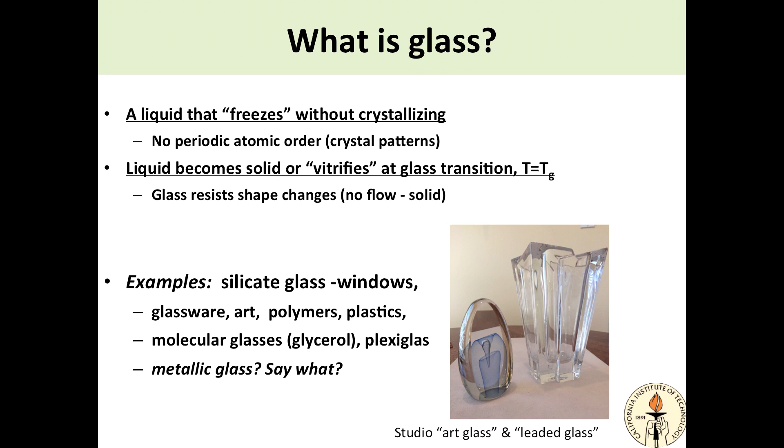Polymers and plastics are glasses. There are molecular glasses like glycerol, soap. Plexiglass, metallic glass, and say what? Most people ask me if you can see through it. What makes something a glass is where the atoms are at. It's got the atomic structure of a liquid.

What makes something a metal or a semiconductor or an insulator is what the electrons are doing. And so we have a material here that's glassy from an atomic point of view, but the electrons are free to roam, so it conducts electricity and looks like a metal. Okay? I'll show you pictures, to give you a better idea.

Almost every metal or metallic object that you've ever encountered in the real world has a crystal structure that looks like that; that's called face-centered cubic, that's the structure of copper and nickel and stainless steel. The atoms are arranged like that. And what you see is they're periodic, they have patterns. If you know where one atom's at, you know where they're all at. All you have to do is translate along and it's all pretty happy.

A liquid, if you melt copper, well, it's kind of a mess. We'll look at a picture in a minute, but if you take copper and mix it with titanium or zirconium, you can make a glass, and that's a molecular dynamics simulation done by a former student of mine who's a professor at Johns Hopkins, and that's a picture of copper zirconium metallic glass. And you see, this looks like a kind of jumbled up mess. It's a liquid that's frozen.

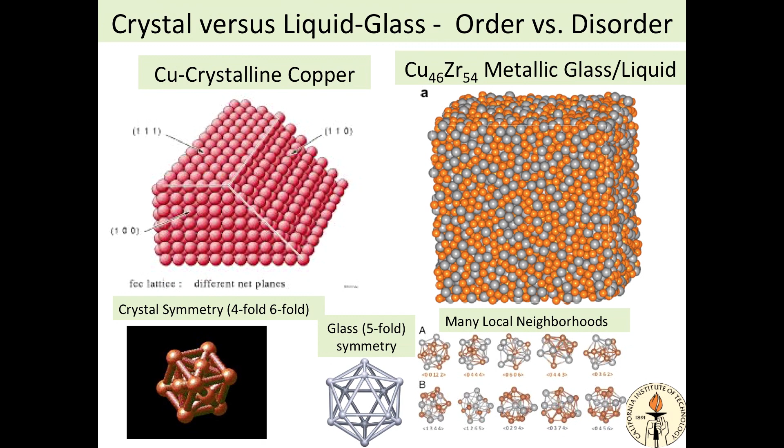And if you look at what's going on in any particular location, there's just all kinds of local neighborhoods. Some places you've got icosahedra, they have five-fold symmetry. When you have a crystal, five-fold symmetry is not allowed. That doesn't fill space. Crystals have three-fold, four-fold, and six-fold symmetry. Liquids locally have icosahedra, right? So they're different structurally and no long-range order. So that's sort of what the atoms look like. So the question next is, how do you get from here to here?

Okay? If you cool a liquid down, when the liquid's at high temperature above the melting point, it sort of looks like this. Every atom's got a little bit different neighborhood. Some atoms are squeezed together by their neighbors. It's like a crowded mess on a city street. And it's sort of like society. How the heck are we going to get organized, right? To get from a liquid to here is actually an extremely interesting exercise.

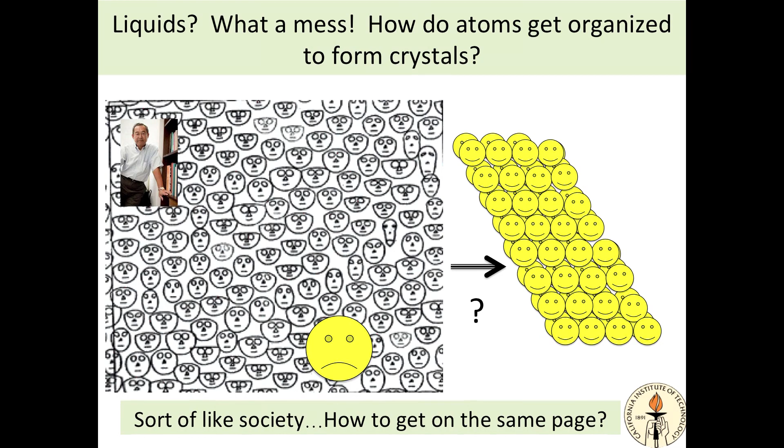Now, when you cool a liquid down, things vibrate slower. It shrinks a little bit, thermal contraction with cooling, and everything gets a little more crowded, and it's like you in a crowded room with standing room only. When the density of people gets too high, you just can't move anymore, right? We freeze. And when you freeze the liquid, you got a glass. So as you cool it down, either you get to here or you get stuck here, all right? And so how does this happen?

Well, the talk's not too technical. It all starts with nucleation. Nucleation is an interesting concept. If you're trying to solve a problem, you have all kinds of ideas, and then one day you wake up, there's that eureka moment, and you say, oh, I understand it now. I just didn't have to see it the right way. You nucleated an idea, right?

Or you post a video on YouTube, and you get some views, and sometimes you get a few views, and then you get a few more views, and then if the mood is right, it goes viral, right? So there are these fluctuations in that random liquid mess, and crystals try to form. If they're too small, they're fighting against their neighbors that are in the wrong place. As you get more and more of them together and making a bigger crystal, they win the battle against their neighbors. They call that the nucleation barrier.

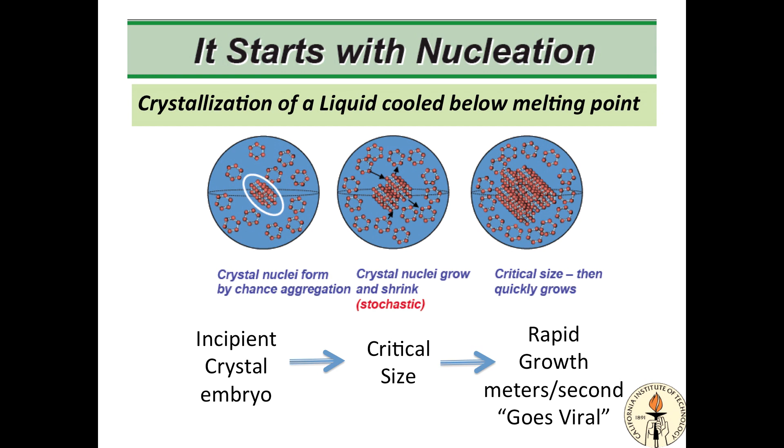And if you get over that nucleation barrier, if the nucleus of atoms gets to a critical size, then it takes off and it grows like crazy. Once it gets critical, it grows. So when we want to make a glass, we have to stop that critical formation of a nucleus that will grow. And it's actually wonderfully exciting to see what it looks like.

Now, just as in the way of explanation, I'm going to show you an infrared movie. And the movie's actually a liquid sample. It's in a cylindrical form. It's contained in a quartz tube. And we've got an infrared video camera which sees temperature. And when a crystal forms, things get organized, they lose some energy, they fall into a potential energy well, and all that energy that's lost is given up as heat. So when a crystal forms, it gets hot.

So if we watched a liquid that was cooled below the melting point, a crystal forming somewhere would correspond to a sudden release of heat at a point. And once it reaches that critical size and takes off and goes viral, it's going to grow like crazy. And so I'll play the movie. This is an infrared camera, so the camera sees, what we're going to do is we have a liquid at low temperature, and I'm going to heat it up very fast. We'll talk later about how we heat it up really fast.

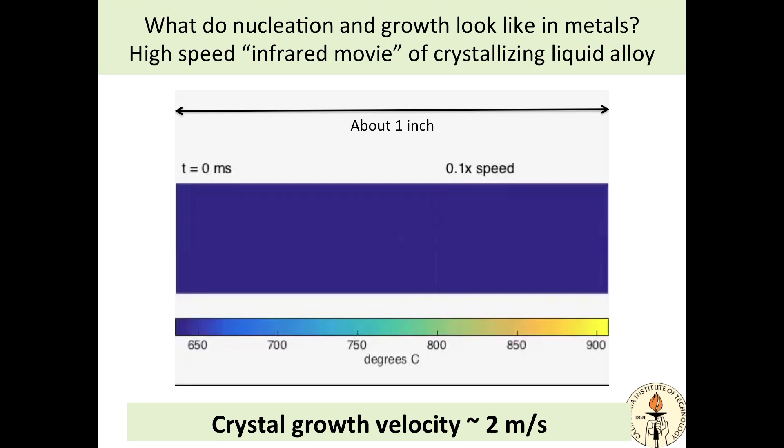We heat it up at 100,000 degrees per second, and we get to some temperature and sit there, and we watch the nucleation process. And the crystals form somewhere, and then they grow, and you can see it because it lights up. So let's play the video. Okay, that's fast, that's real time. And now I'm going to play it at 0.1x speed, and these are thousandths of a second. So it's a very fast infrared camera, and there a crystal formed.

And this is about an inch. And in a few hundredths of a second, the crystals grow all the way across the sample. Once it goes viral, it goes like crazy. You can actually figure out it's going 2 meters per second. That's a little faster than you can walk. It's also enormous when you think about how big atoms are. This crystal forms, and then it's going to grow. And it grows by adding atomic planes, and it's going to add 10 billion atomic planes per second.

So once the crystal's stable, it just, pew, right? And it's all over in a flash. So if you take a piece of copper and you cool it down, at some point you're going to form a crystal, and then it's going to solidify by releasing all this heat, and it's going to shoot through the sample. That's how. Now, if we're going to make a glass, we have to avoid the nucleation event, the local embryo that triggers this. And so, just a little bit about the science.

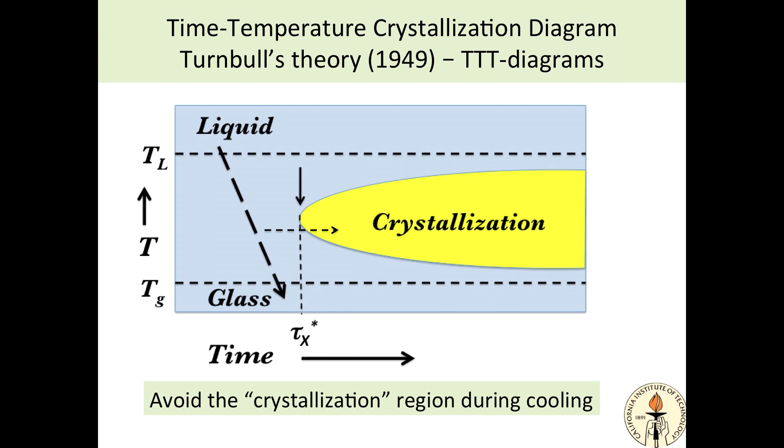So Paul developed something called splat quenching. He took a piston and an anvil and dropped a droplet of metal alloy and smacked it. And the anvil and piston are made out of copper. They conduct heat really fast. And he figured out that you could cool a metal at 1 million degrees per second by splatting it. It's called splat quenching. Well, he started splat quenching metal alloys and shortly discovered that some of them form glass. You cool it fast enough, there are no crystals, you get a glass. That was the first metallic glass, 1959. Okay?

Rapid solidification. Paul started a whole field. It was called rapid solidification technology for processing metals at high cooling rates. Right? But he discovered metallic glass. That first metallic glass was an alloy of gold and silicon. It's a gold glass. It's like 20 karat gold, but it's glassy. Okay? The problem is you have to splat it into a foil that's about 1/10 the thickness of a hair to get the heat out fast enough to beat the crystallization, right?

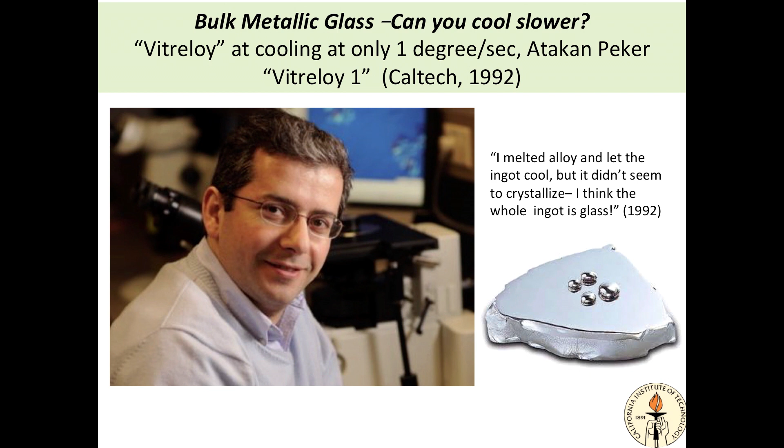This is a big chunk, and this was a very good glass former, kind of like silicate glass. It starts to look like more common glass. That's a nice ingot. We put it in the electron microscope and blow it up about 400,000 times, and you can see atoms, or you can resolve atoms, and they're all jumbled up. It's liquid-like, no crystals. If you look around, you'll see pentagons that are part of icosahedra and all that. It's a nice glass.

And so the way we usually tell where the atoms are is we X-ray it, and the X-ray pattern looked like a liquid. It looks just like a liquid metal. And if you heat it up and look at how it behaves thermally, lo and behold, there's a glass transition. And you get up above the glass transition and it softens, like doing glass blowing on silicates. You go above the softening point, it gets soft, you can blow it, work it, so it softens up.

And then if you keep heating it, suddenly it crystallizes. We hit the TTT, we hit the crystallization nose when we heated it up. And you take the crystallized material, you keep heating it, and it melts again, and so we made a glass. It's a big chunk of metallic glass.

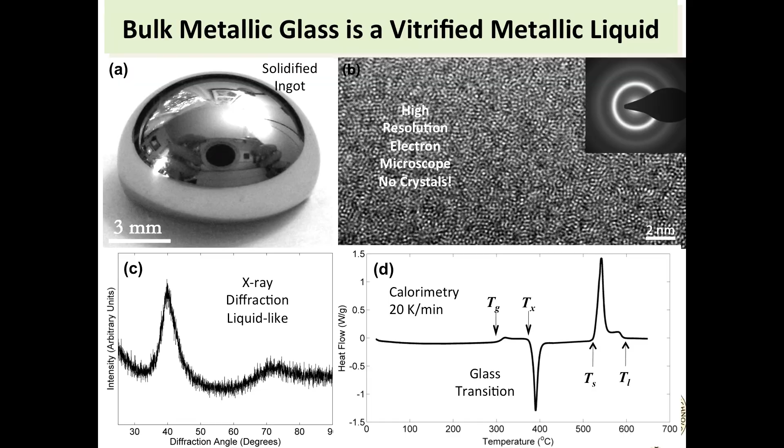So, of course, when we could make these things in bulk form and at low cooling rates, Atakan Peker was only cooling this at, go back, 1 degree per second. That was 1 million. He's only cooling at 1 degree. So we slowed the cooling from the Duwez experiment down by 1 million times, and we still make glass. So now how do you study these liquid metals? Well, we want to study crystallization. We want to map out that crystallization curve. We want to test the theory that Turnbull proposed.

And at the time that we discovered this, I had a colleague up at JPL named Won Kyu Rhim. And Won Kyu was involved in other things. He was trying to levitate spheres, droplets of liquid. And it was water. And he developed a technique called electrostatic levitation. What you can do with this, if you shine a laser on here and kick off some electrons, the ball gets charged, and then you can use an electric field to counteract gravity, and you can levitate the ball.

You can put it in a vacuum chamber, and you can instrument it with video. You can see the crystallization event when it lights up. You can do all kinds of things. You can ping the drop and watch it oscillate and back out the viscosity of the drop. You can see how it's becoming more viscous as you cool it. You can map the freezing curve. So we can go in and look and see exactly what's going on.

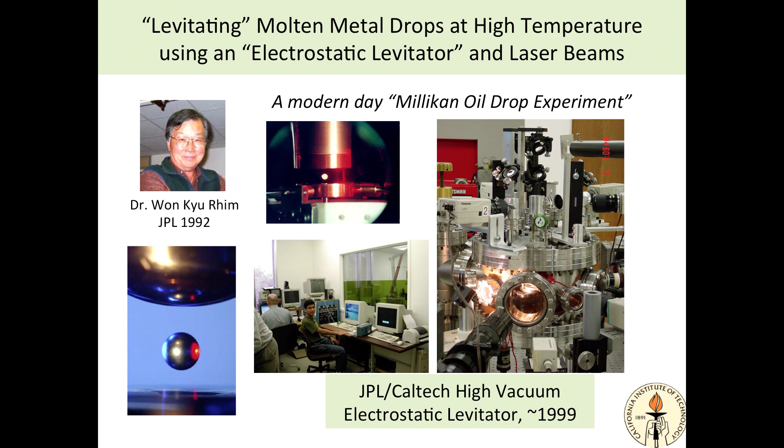So with the electrostatic levitator, there's a levitated ball of the vitrified alloy, the zirconium, titanium, nickel, copper, glass forming alloy, and it's sitting here at 1300 degrees centigrade, 2000 Fahrenheit, and it's in a vacuum chamber, and there's no container, it's just hanging out by levitation.

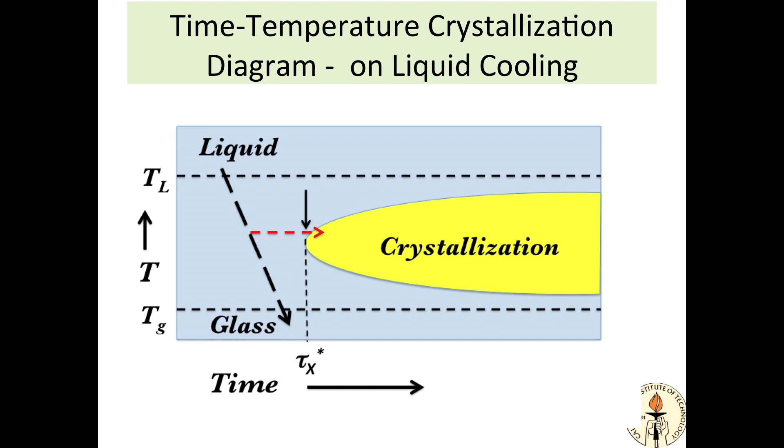Okay? So we study this, and of course, going back here, let me remind you of this. So we melt it, we can cool it down and hold it here by adjusting the power of the laser that we're using to heat it. And we can sit here and measure how long it takes to hit this. And so we can measure the crystallization map. And there's the map of Vitreloy 1.

And you can see it takes 10 seconds, for example, here. That's a different alloy. This one takes 10 seconds to nucleate crystals. And we can ping the drop, make it oscillate, and if you watch the damping of the drop oscillations, that tells you what the fluidity or the viscosity is. So you can do all this stuff and measure it.

It's fun to look at a movie again. So this is a levitated drop, and what we've done is heat it up above the melting point, then we turn off the laser and watch it cool down, and then it lights up when it crystallizes. So there it's hot, 1300 degrees, it's cooling down, now it's down to 600 degrees, and about 600 C, boop, there it crystallized. That's what it looks like. Crystal nucleated somewhere, grows like crazy, gives up a bunch of heat, it lights up like a light bulb.

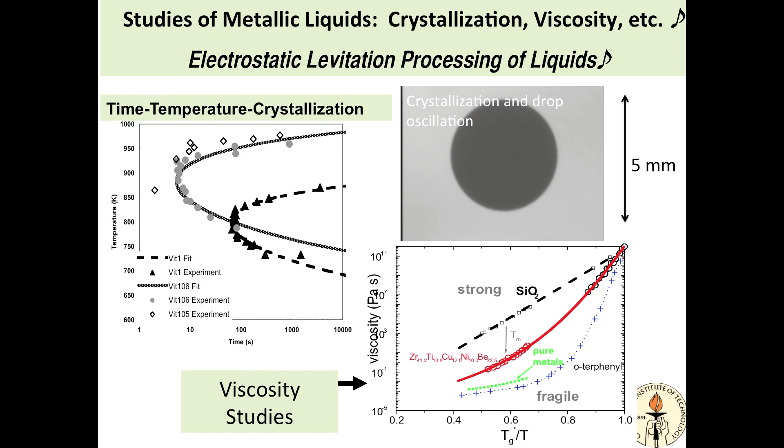You see the drop was spinning. We can ping the drop. If you do high-speed video, you can watch the drop oscillations, you can determine the viscosity, so we can go in and measure all of the physical properties of the liquid that go into Turnbull's theory, and we can test the theory, and so on. So what do we learn?

Well, we found out something that Turnbull already told us in 1969, that if you make the ratio of this glass transition temperature and the melting point of the liquid, if you make the ratio of Tg over TL high enough, you squeeze out the temperature region where crystallization can occur, and that pushes the crystallization map to much longer time, so you get a good glass.

So we learned that. And we learned that the more viscous the liquid is, the slower the atoms rearrange themselves. When you're down in the middle of this region where you're at risk to crystallize, if the fluidity is low enough, the rate of forming embryos goes down, and if you freeze it far enough, you get a glass. So the two things that are competing are the ratio of this, and so we put this story together. I brushed a lot of things under the rug, but I can tell you simply what's the idea behind developing bulk metallic glasses, the materials I'll tell you about in the second part of the talk.

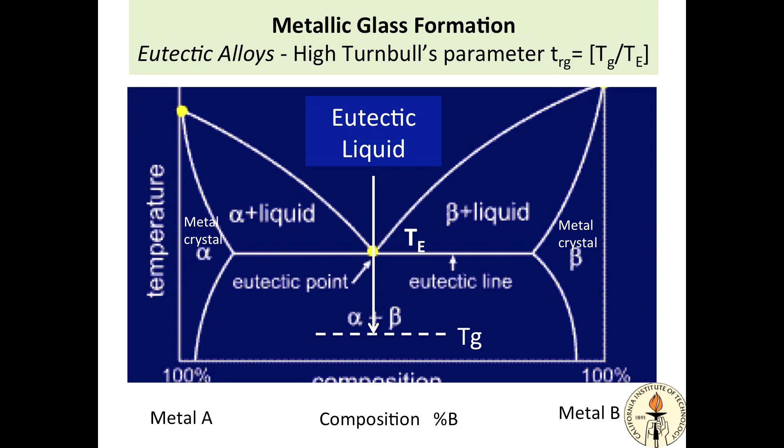The idea is this. This is called a eutectic alloy, and this is just a schematic diagram. We have a metal A and a metal B. They have a melting point. If we put the two metals together, they can melt at a much lower temperature. Eutectic, tektos, Greek word for liquid, eu together, melt together. They melt together at a much lower temperature. Well, Turnbull told us we want this glass transition, which is kind of down here, to have the highest ratio possible with the melting point. Obviously, when things melt together, you drop the melting point, the Turnbull parameter becomes favorable.

The business of developing bulk metallic glasses is a business of putting 2, 3, 4, even 5 or 6 metals together to make a very deep eutectic, where we push the melting point very close to the freezing point, the glass transition, and that just squeezes the crystallization out. It works. With that idea, that's how Peker found the first bulk metallic glass, the ingots. Well, let me show you. Once you learn more, you do your science and figure out how this viscosity story works.

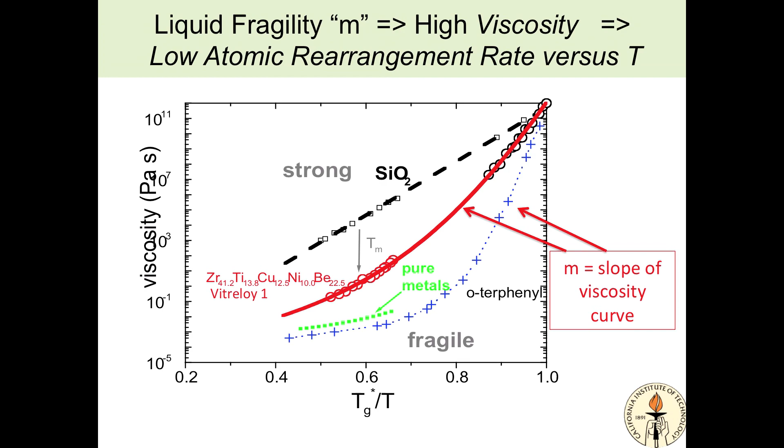And I don't want to spend too much time, but when you heat a liquid up, all I want to show you here in the viscosity is that at the glass transition, the viscosity is 1 trillion Pascal seconds in some units. And if you have a high temperature liquid, it's 1 or 1/100th of a Pascal second. So when a liquid freezes, the viscosity, or its resistance to shear, changes by 1 trillion times as you cool it down. So this freezing is incredibly rapid. It's like the standing room only crowd. As you squeeze people together, the possibility of rearranging yourself gets frozen out very rapidly. It's called a jamming transition for obvious reasons.

So we play games. These are maps. And we were interested in developing practical metallic glasses that you can use. This is recent work. Now we're up to 2008, 2009, right? So we were exploring iron, nickel, chromium metallic glasses. We alloyed them with things that have deep eutectics, like phosphorus and silicon, and we coax it into a very deep eutectic and squeeze out the crystallization, and we make bulk glass, except these glasses are chromium, iron, nickel. What's that called? Stainless steel.

Right? That's amorphous, that's glassy stainless steel. And how did we get there? It's a long story, but basically it's the eutectic story. It's finding points in the alloy space, composition space, where the eutectic exists and the melting point's depressed to the point where the liquid becomes viscous enough so we can make it easy to form glass.

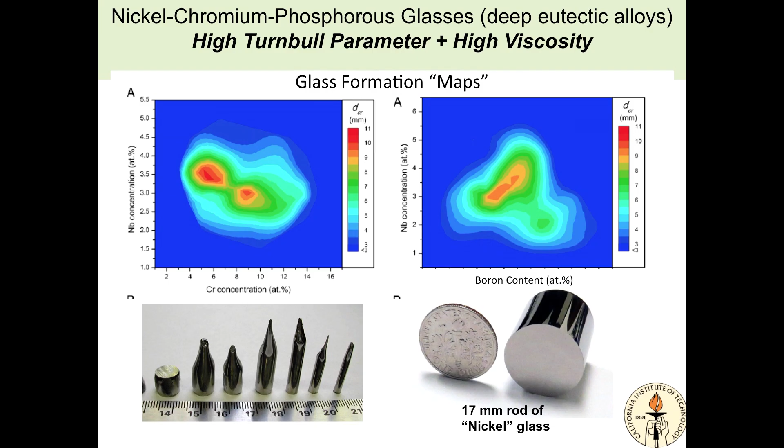It's kind of like stainless steel. That's a 17 millimeter rod of it. And you just heat it up, melt it, cool it in a quartz tube, use silica, because we don't want something that has crystals. That would seed the crystallization. So we melt it in a quartz tube, we quench it in water, and we make amorphous stainless steel.

Okay, you say, oh, that's all nice. It's a great science story. Why do I care? What do I want to do with amorphous stainless steel or glassy stainless steel? Well, let's go take another look now. So that's what the stuff looks like. You can't see through it. It's a metal, but it's a glass. And that's a nice rod. It looks very shiny. It looks like a liquid because it's a frozen liquid. No crystals. You can make rods. We can process it.

And so, why? Well, turns out these metallic glasses are totally different than crystals. They deform differently. They have different mechanical properties. They're very strong and they're very hard compared with conventional stainless steel. They're very elastic and springy. At one time we tried to make golf clubs. Actually, John Daly and Paul Azinger used liquid metal golf clubs on the tour in 1998. Right?

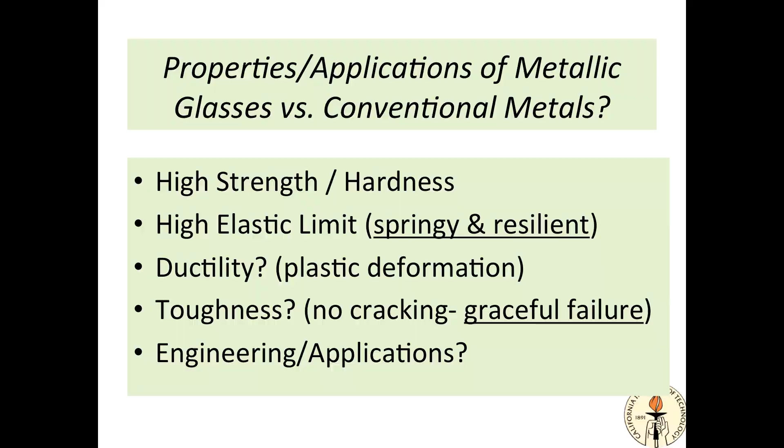Okay, so just to show you, if you take a tensile bar and you pull it, these are some units, they're megapascals. That corresponds to about 400,000 pounds per square inch. So if I have a square inch bar, I could hang 400,000 pounds. I could hang 60 pickup trucks, right?

That's normal metal. That's a high performance thing you make airplanes out of. It's about that strong. Actually, I've overestimated. Aluminum's down here. We make airplanes out of that. That's steel. We make skyscrapers and bridges out of this. That's metallic glass. Okay?

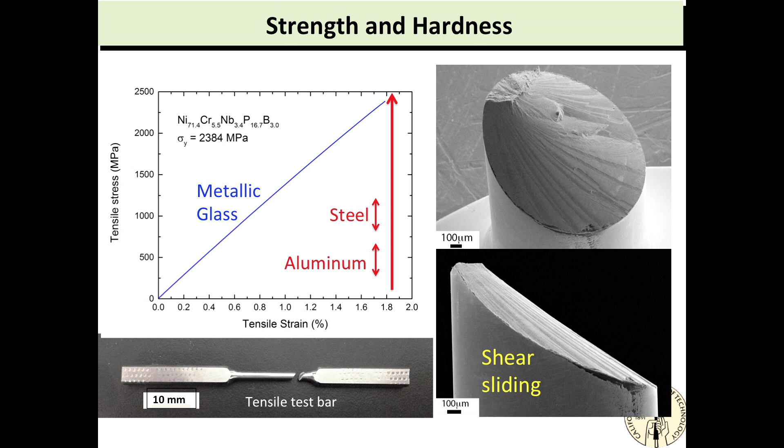There's some funny things that go on. If you pull it in tension, it slides off. It forms a little band and it just slides off like a liquid slides. What's going on here? That's very different. Well, that's what happens if you pull it. If you bend it, you see something totally different. So we take a strip or a bar and we bend it. And you see this.

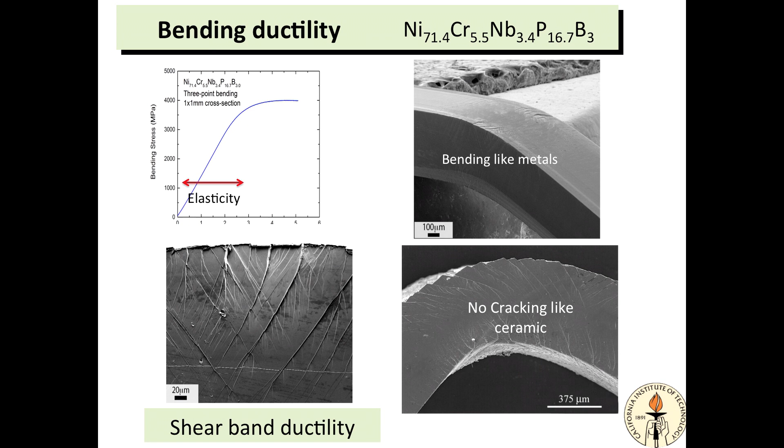This doesn't look like an ordinary metal at all. We see these bands along which it shears. It looks a lot more like how nylon or Teflon crazes. The deformation mechanism's totally different. The fact that you have a liquid structure changes everything, right? Let me show you how it changes everything.

Well, if you're in a crystal and you want to deform it, you try to shear it by pushing the top this way and the bottom that way. Crystals form dislocations, and this is how they deform. G.I. Taylor, 1934. That's the basis of modern metallurgy, dislocations. The stress that's required to make those dislocations move determines the strength of steel.

Now, if I take a metallic glass, this is a simulation by Marios Demetriou, one of my postdocs who now works at our company. And if you do this on a simulation of an amorphous metal, it looks completely different. Eventually things localize into bands that look like the shear bands that we saw when we were bending it.

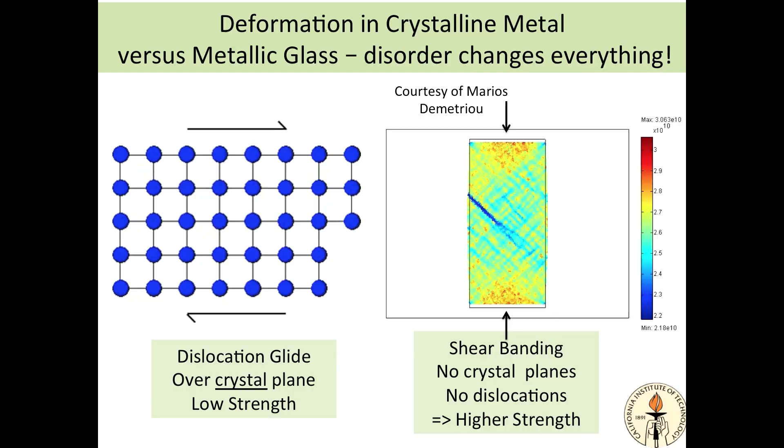And so let me put this all together. We've got a deformation mechanism. It's very different. We've got a yield strength to get the shear bands to form that's 2-3 times higher than conventional metal. And so what's really the interesting question is, you have a very strong material. In material science, if you make something very strong, like carbon fiber, or a ceramic, or silicon carbide, it gets very brittle.

Make it too strong, then it fails by cracking. And the resistance to cracking is called toughness. When we build structures or use engineering materials, what we're really looking for is an optimum balance between the strength and the toughness, right? So titanium 6-4, which you build airplanes out of, has been engineered for 30 years to be tough and strong.

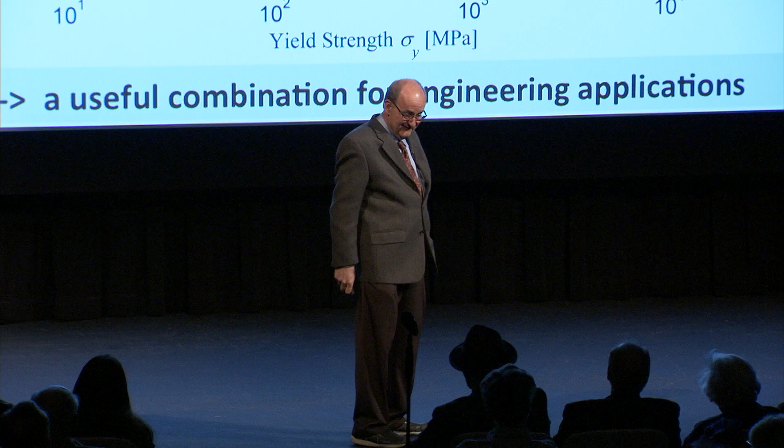But they're moderately tough, sort of commensurate with their strength. Ceramics, here's silica glass, the window pane. Man, it's strong on the strength axis, but man, is it brittle. Of course, you drop it on the floor, it shatters. You can temper it to try to stop the cracks from forming, and you do fancy things to try to make it a little tougher, but basically, we don't build airplanes out of window pane glass.

We want our airplane to fail gracefully. We want some warning. We want to go in with an ultrasonic imaging system and look for little cracks before they get big enough to propagate and the engine falls off. It actually happens. One of my Caltech colleagues was killed in Chicago in 1979 when the engine fell off of his American Airlines DC-10. Some of you are old enough to remember. In Chicago, we had Dick Schuster, who was the head of development here, and there were 3 Caltech people on that plane. The engine fell off, it's a crack.

Okay, so here's the world of metals. Metals are pretty strong. Down here, that's 150,000 psi. That's titanium and steel. That's the stuff we build airplanes and bridges out of. It's pretty strong, not as strong as ceramics. Ceramics can be 10 times stronger. Carbon fibers, for example, right? But ceramics have no toughness. You can't use them for structures.

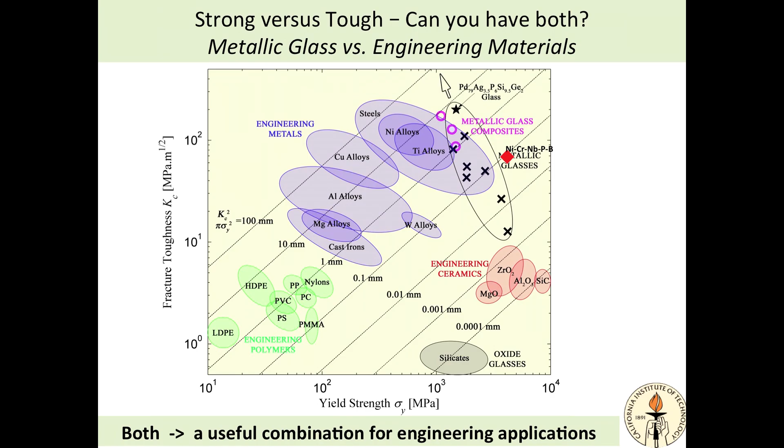They're at the frontier of tough and strong. That's the nickel, that's the amorphous stainless steel. It's out of the envelope. It's got the best combination of strong and tough of anything out there. There's nothing else that is comparable. Okay? It's the best material I could think of to make certain things out of. The shear bands have their own problems, but that makes these materials more than a laboratory curiosity that my advisor suggested the splats were.

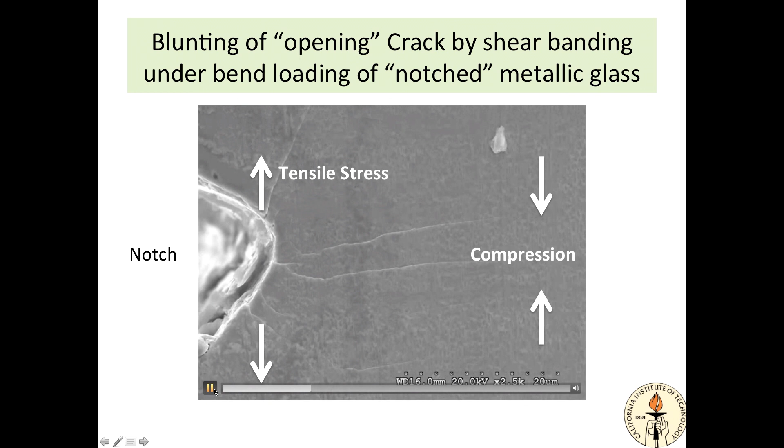I just want to show you, this is a crack in a piece of nickel chromium, or maybe a zirconium glass, and I want to show you how the crack gets arrested. You try to propagate the crack and you see these shear bands, they're all over the place. It's screening the crack and arresting the crack. That's what makes it tough. Same thing, the shear bands are the story of how it deforms, how it screens cracks, how it performs. So that's the mechanism of deformation.

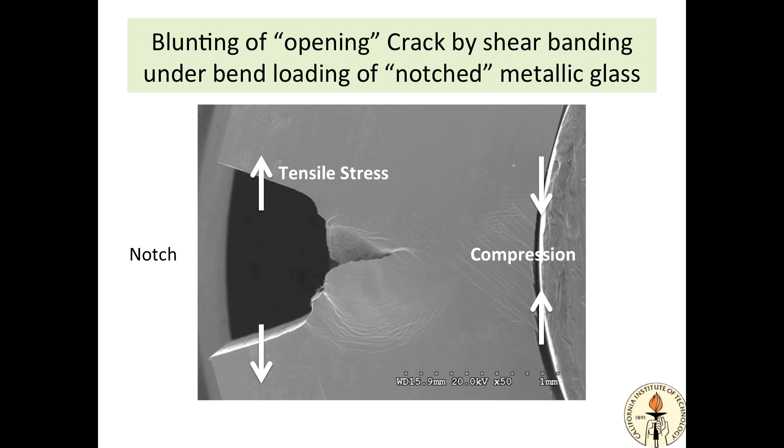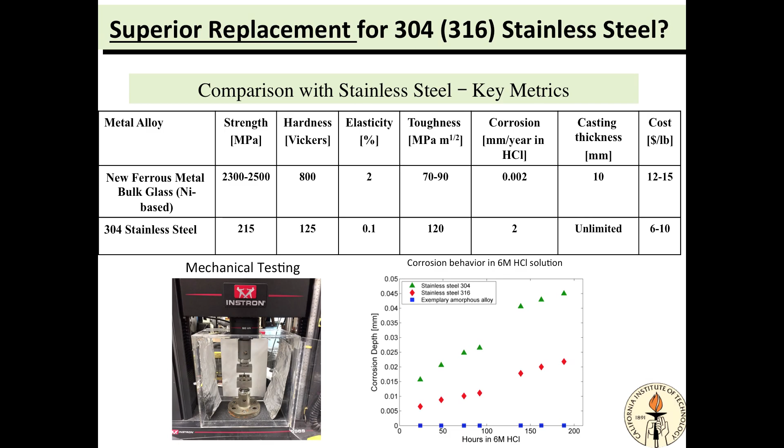Just for fun, you can put it in acid and look at how it corrodes. We use stainless steel because it's very corrosion resistant. We put this in hydrochloric acid for a week, and here's the rate at which the stainless steel corrodes, and we couldn't measure anything with a metallic glass. It doesn't corrode. Right? It's wonderful. Incredibly stainless. Okay?

I think, wow, I'm on time. Not too bad.

Okay, so how would I make something out of this? Well, when you make metal stuff, airplane parts, fasteners, iPhone frames, Apple hogs the iPhone frames out of a piece of stainless steel with a computerized milling machine. That's how they make the MacBook Pro, right? They take a chunk of aluminum and they mill out all the holes. You can machine it. You can get very precise parts that way, but it's pretty expensive. And most of the metal ends up on the floor, right?

You can cast it. Casting's okay. It's got all kinds of issues, but you make engine blocks out of castings. If you want to make a precision part with thousandths of an inch, you don't cast it. In the modern world, a lot of the stuff you use every day is made by metal powder injection molding. What do you do there? You take metal powder, you mix it with plastic powder. Plastic powder is a glass with a low glass transition temperature. You heat it up, it softens, and then it carries the metal along, and the mixture can be molded.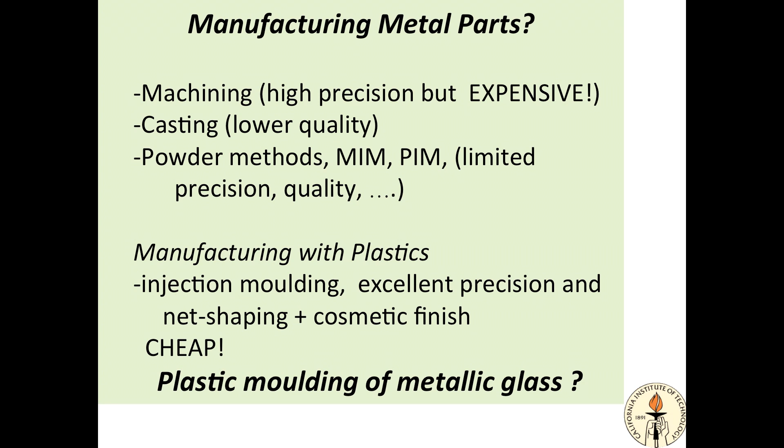Like you injection mold plastic parts, like Robbie the Robot, or the garbage can at the Orchard Supply. Plastic parts are wonderfully net shape, they're precise, you can get great tolerances, and they're cheap. Why? Because we use injection molding. We make one mold, and we take the plastic, heat it up and soften it, and then squeeze it into the mold, open it up to kick out the parts, boop, boop, boop. We can mass produce parts cheap.

It's much easier and much cheaper to injection mold plastic than it is to machine metal or metal powder injection mold it. There I've got to blend the powders, I've got to sinter it, it shrinks, I have to finish it with some machining, blah, blah, blah. Well, here we have a metallic glass. What it has in common with plastic is it's a glass, and you saw it softens like a glass, and you can blow mold it, and technically you can injection mold it. What's the problem? That all sounds too good to be true.

Well, it sort of is, because we run into the crystallization problem. If we're molding it above the glass transition but below the melting point, where it has the viscosity that plastic has when we injection mold it, well, if we hit crystallization, zoop, it's all over. Remember, it goes viral. So,

Back to Turnbull. We've got a certain amount of time. We've got to get up here where the viscosity is like plastic, form it and injection mold it or do whatever we're going to do, and get it cooled down and not get over here. Well, that's hard to do. It's not as stable; the crystallization curve of plastic is orders of magnitude longer. For silica glass that I blow mold, the crystallization curve is 100, 1,000 times farther away. These are still not fantastic glass formers. They're good glass formers. So you've got to get up here, do your forming, and get down again before you run into that. You've got to go fast.

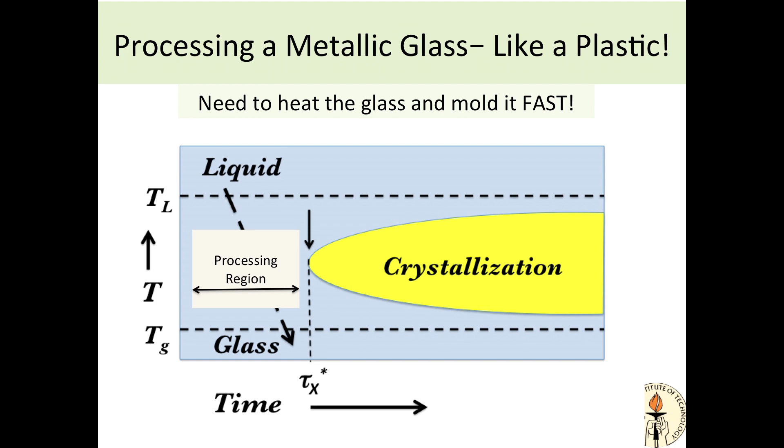So we want to take a piece of metal, one of those rods I showed you of the stainless steel. We want to heat it up. We want to heat it up quick. We can't put it in a furnace because it takes too long to conduct the heat, and you can't go fast enough. We want to get up there and reach the temperature. We want the whole piece to be at the same temperature. Well, how do you do that?

One way to do it is to pass a current through an alloy, just through a rod, and it heats up like a resistor, gives up heat. Well, if you pass enough current, you can heat fast. How much current? Well, if I have a 1/4-inch diameter rod and I pass 20 or 30,000 amps for a millisecond, I can do what I want to do.

Sounds awful, right? Sounds like who in his right mind would. And let me remind you of this crystallization that's going to happen: if we take too long doing the forming, then we're going to hit that. So there's crystallization. This is time now, on a log scale, and that's temperature divided by the melting temperature. So the Turnbull parameter is this over the melting, and so on. This is just a little bit busier version of the TTT diagram.

We want to get up here. And how fast would I have to heat to get up here, do my forming, and not run into the crystal? Well, these are constant heating rate curves on the chart. So if you went at 1,000,000 degrees per second, you could get up here and you'd have a whole second to process. Okay? Well, that sounds like an awful story.

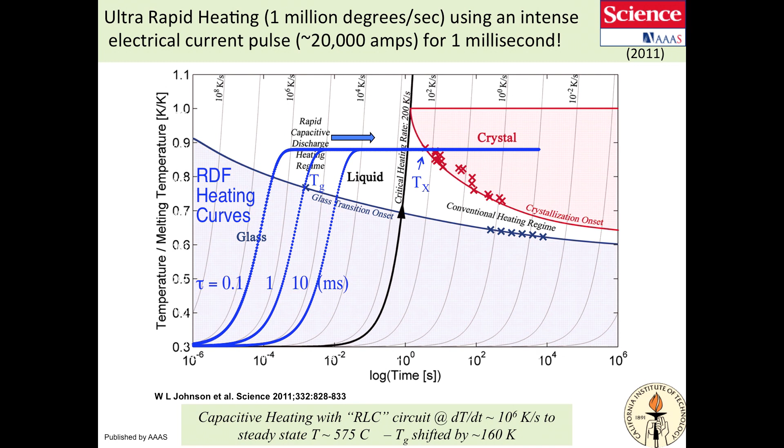This is one of my graduate students, Georg Kaltenboeck, who now works at our company. And this is a little device we call an RDF. There's a bunch of capacitors here, and here's a rod of metal between two copper electrodes, and we're going to discharge the capacitor in 1 millisecond, take the metal from room temperature to 600 degrees centigrade, where it flows like plastic, soft plastic, like polyethylene in a molding machine. We're going to squash it.

So I'm going to show you a movie that takes 13 thousandths of a second. It's pretty quick. And so what's going to happen, we applied a small force on the rod. That's a 4 millimeter rod or something, and there's about a 40-kilogram force. And I'm going to discharge the capacitor. It's going to get hot very fast. And you'll see what happens. It gets soft and boom, it's like putty.

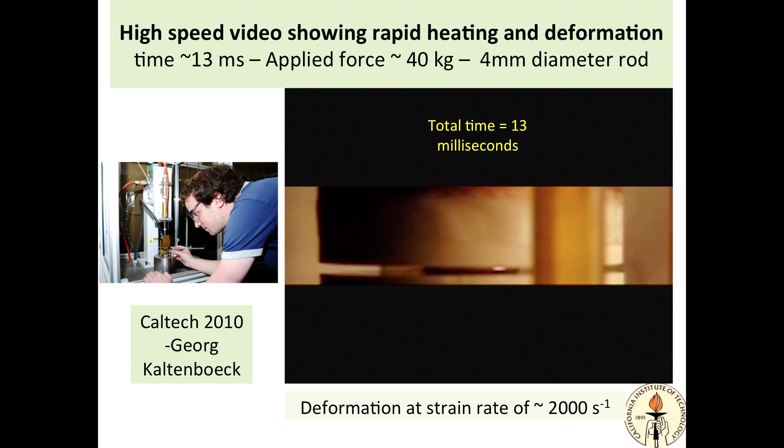And these are metal surfaces, so it quenches like Duwez's old splat, that's thicker, but it's cooled fast enough. We get down before we hit the crystallization. So we did plastic forming. That's molding, right? Well, you say, that looks like a laboratory curiosity. We're back to my advisor, right?

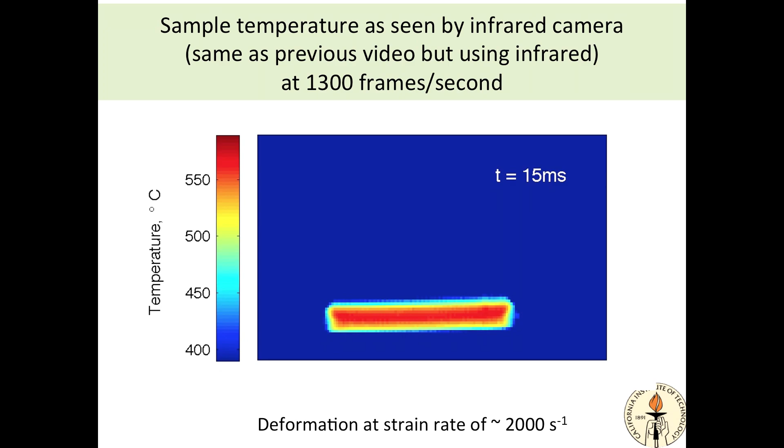And just for fun, I took the infrared camera and we ran it at 1,300 frames per second, and that's what happened. It got hot, 600 degrees, and then it got squashed. And the movie is 10 milliseconds, it's all over. That's 100th of a second. Can I do injection molding? Yeah, if I go fast, I use capacitors, intense current pulses.

And believe it or not, I started a company in 2010 with Marios Demetriou, and we figured out how to do this and built a machine to do it. This is a rapid capacitive discharge machine. It's got a big bunch of capacitors, right? For those of you who like electronics, there's about a farad in there.

We charge it up to 200 volts so we can store 30,000 joules of energy in the capacitor, and we can deliver it to a rod of metallic glass at the bottom through copper electrodes, or we now use tungsten electrodes, and we can heat this in a millisecond to a process temperature, and we put a drive on there.

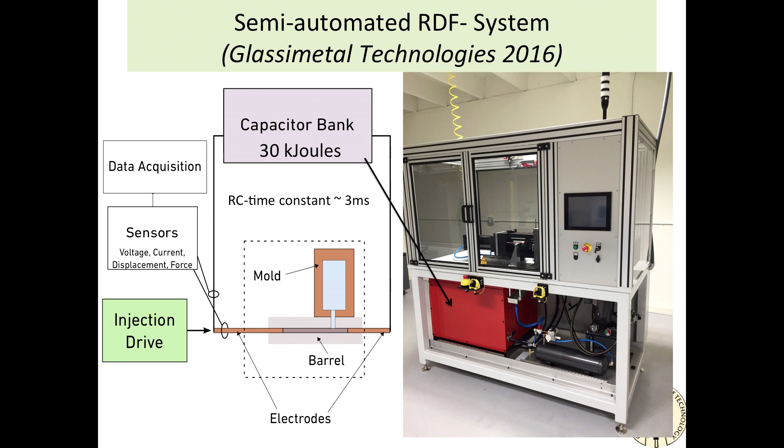That's a pneumatic drive. So there's a drive, there's a discharge, we put monitoring stuff, we can measure the force that's on the drive system, we can estimate the viscosity, we can do all the nice stuff you'd like to do while you're running a process like that.

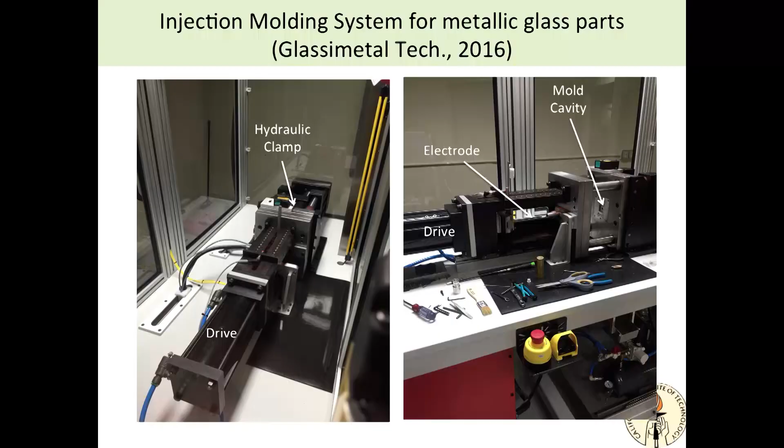And if you put a rod of metallic glass, one of those amorphous stainless steel type rods that I showed you in an earlier picture, you can flash heat that in a millisecond. And you can put a mold here and a hydraulic clamp. That looks like a plastic injection molding machine, but there's no furnace, no hot barrel, and it's not like a Cincinnati Milacron plastic molding machine that's 30 feet long. This machine's about 6 feet long, and you can sit it on a tabletop.

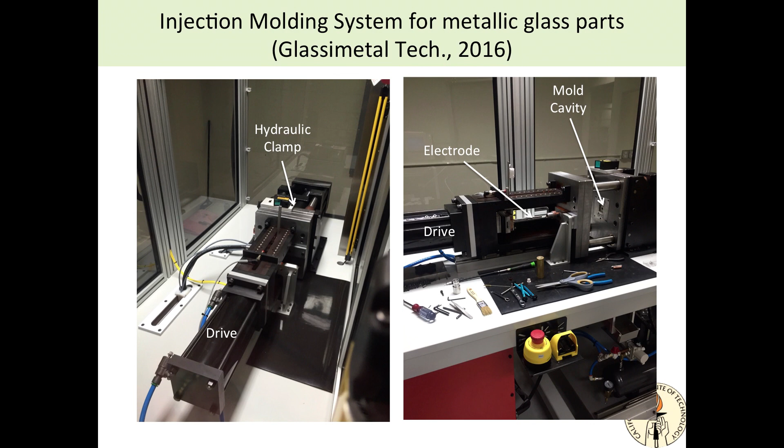There's no furnace. Nothing gets hot. It's all electronic. And you go boom. The metallic glass rod over here gets soft, and it gets injected through a gate like a plastic injection molding machine, and lo and behold, you make parts. You make a mold, you inject it. Okay, this is a very simple mold.

That's the barrel. There's a little gate, and I got a piece of metallic glass. It's going to get heated very fast and then squashed by the drive and extruded into here like a plastic part. And we turned that rod into that plate. And our mold was machined, not a fancy mold. It's got machine marks, and you see we replicated everything.

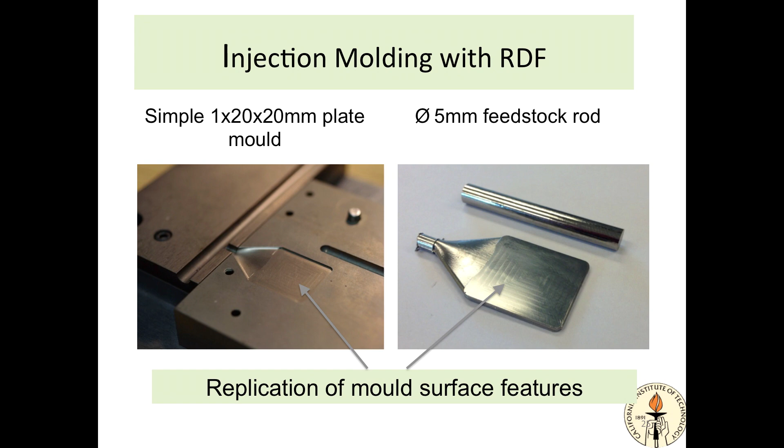The details of the mold, even the machine marks from milling it, are replicated on the part. It's wonderfully precise. Tolerances are 10,000ths of an inch. It's a precision metal part made out of a metal that's 5, 6, 7 times stronger than traditional stainless, more corrosion resistant, harder. So we're going to have some wonderful parts for something.

Okay. So this is just showing you can put different kinds of molds. You can make little shapes and toroids and zigzags and little tier molds. That's a logo plate for our company, Glassimetal. That's our company logo. And you see the mold had little machine marks in it. Every little detail that's in the mold's picked up. That's the point.

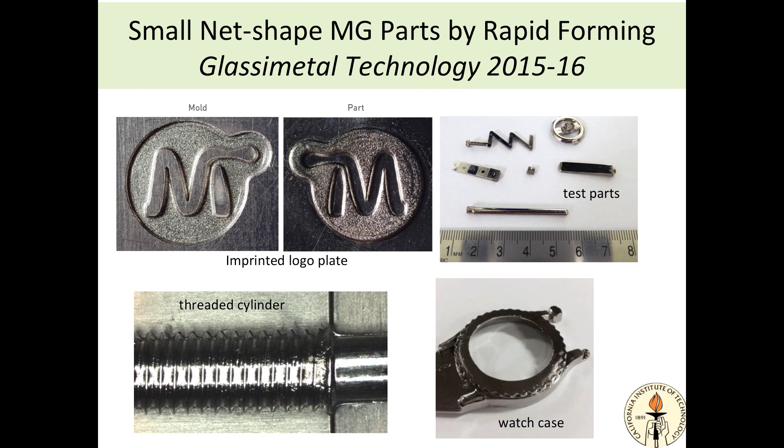This is a screw. We made a screw mold, and we filled it up, and you can replicate a screw and get the threads and all the detail. Right? And you make a watch case. Okay? So you can make parts. And you can make them fast.

You make one mold. You take metallic glass rods, and if you automate it and feed the rods in there, you can bang out watch cases or parts for your smartphone or medical instruments. So where will you see these things? Okay, what kinds of things can you do with this?

Well, you can make electronic frames and casings for your iPhone or your laptop or your watch. Right? You can make dental hardware. You could do orthodontics or endodontics, make parts, dental implants, brackets, medical parts, stents, metal stuff that you want to have no corrosion, very springy. It's a perfect stent if you're doing cardiovascular, right? You can make micromechanical devices, watches, precision instruments, gears.

One of my former students is trying to put gears on the Mars rover that are made of metallic glass, because right now the gears wear out and they have to lubricate them, and you have to bring a heater and the whole system along. It's a huge baggage to carry to Mars to lubricate the transmission on the rover. If you use a metallic glass, they think they can get rid of the lubrication and the heater for the lubricant and all that. Fasteners, connectors. So you could do a lot with this. That's where we're currently at.